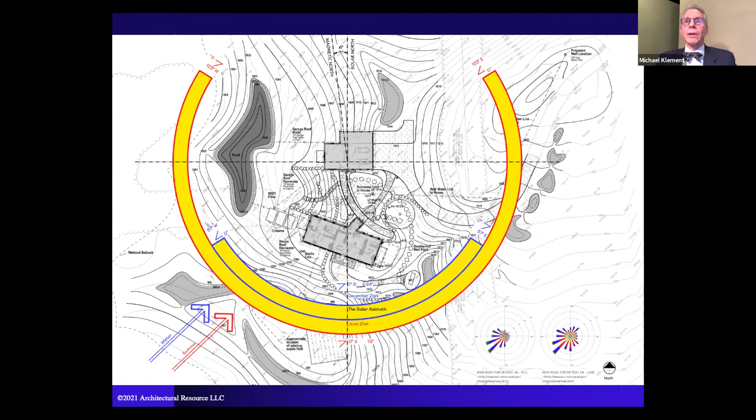But what are the particulars? Well, we're going to get into all the aspects of this project, what we did, how it performed, and the reasons we did that. This is the site plan showing the house above and showing the sun's path. The house was carefully designed and positioned to take advantage of that solar energy. But you might be thinking, certainly many people do, why in the world would Tom and Marty want to build a Living Building Challenge project? Well, let's hear from them directly.

It isn't as if we woke up one day and said, let's build a Living Building Challenge house. As we look back, it's a long series of small steps. And each step was simply the next logical thing to do. So we started with, let's build a house, let's build it out in nature somewhere. We found our 15 acres just outside of Ann Arbor. Well, wait a minute. Let's rewind. Because what you actually started out to do was a remodel of your existing house. Yes, it's true. That'll teach you to get an architect involved. Yes, absolutely.

So we found this land, and as we learned about the land, we realized that it had been farmed, industrial style farming, for many decades. And the soil was used up, worn out. It just happened at the same time we were learning about permaculture. Bigger title now is regenerative agriculture, ways of growing food that produce food for people to eat, but also regenerate the land. We also were learning about problems in food production and distribution in the United States. Factory farming, food deserts where it's really hard for people to find fresh produce to buy.

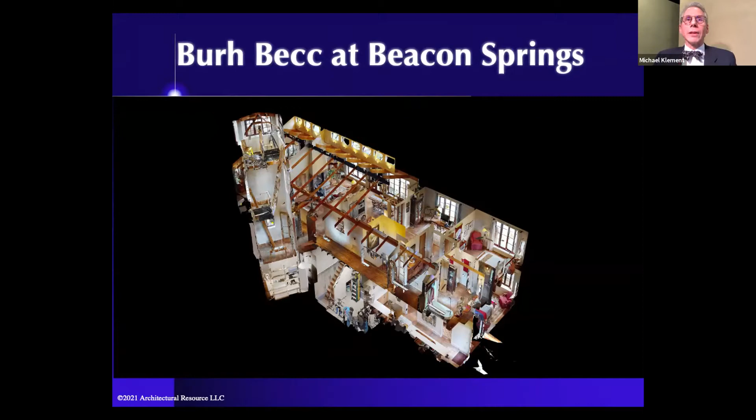And you can go and visit this yourself if you go to the Visible Green Home website, which looks like this. And at the top, there's the virtual Burh Becc Earth Day celebration. If you click on that, you'll get a drop-down menu. If you click on Tour Virtually, you will be able to access this exact virtual model that we're sharing with you today. So you can, from the comfort of your own living room, go and visit their home anytime you'd like to. And here again is that website, visiblegreenhome.com.

All right, so this is the entry area to Tom and Marty's home. And we're now walking through the small transition space, and we're coming into the large open living area. Again, I'm showing you this now, but you at your own convenience can go through and visit this house in the same exact fashion. And as we head towards the back of the house, we're looking out at the patio.

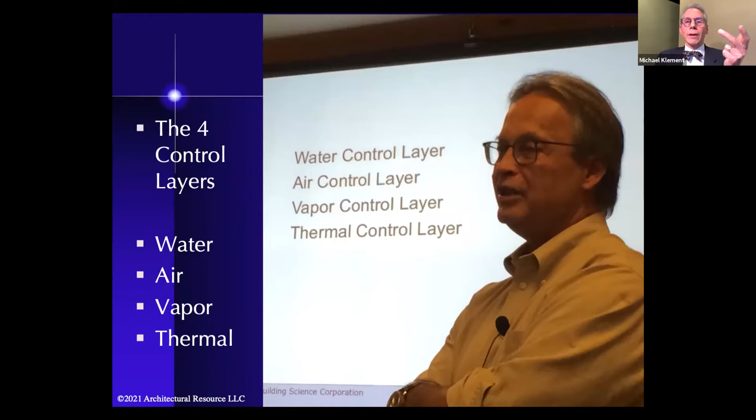And there are 4 components to that envelope that we have to be super diligent about: the water layer, the air layer, the vapor layer, and the thermal layer. And you'll notice that the thermal layer is the last piece. For Tom and Marty's home, we used a variation on something called the perfect wall. This was developed by Building Science Corporation and allows building walls to dry to the inside and the outside. Very important.

In Tom and Marty's case, we have an R30 slab. Now, for those of you who don't know, R is resistance to energy flow. It's the inverse of U, which is thermal conductivity. R30 is the slab; building code asks for R10. The basement walls are R30; building code asks for R5. The above grade walls in Tom and Marty's house are R48; building code asks for R20. And their roof is R68; building code asks for R38. So we are significantly improving the building envelope in Tom and Marty's house.

And this is a view cut through the exterior wall of the house, showing you the roof, the exterior wall, the foundation. And if you notice, this insulation plane, which is up here, continues here, all the way down here, and then under the floor and up the wall. This is one of the most robust and progressive building assemblies that we have ever designed.

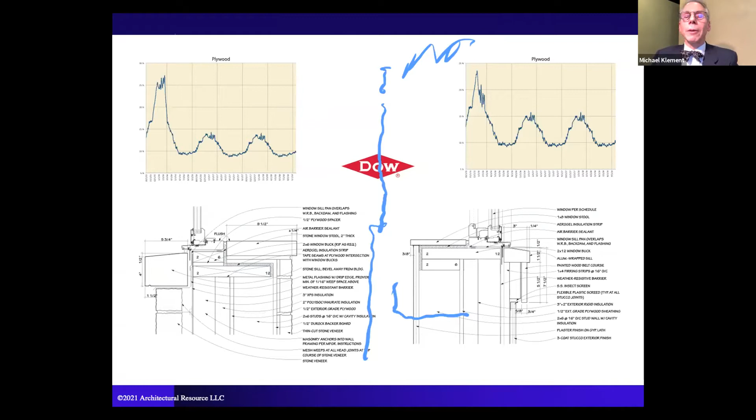Now, when you do this type of building assembly, you want to be mindful of, whoop, how come it's not clear? Delaney, can you clear my marks on the screen? For some reason, I don't seem to be able to clear that. See, if something doesn't go wrong, it's not a Zoom meeting. Let me try going back. There we go. All right.

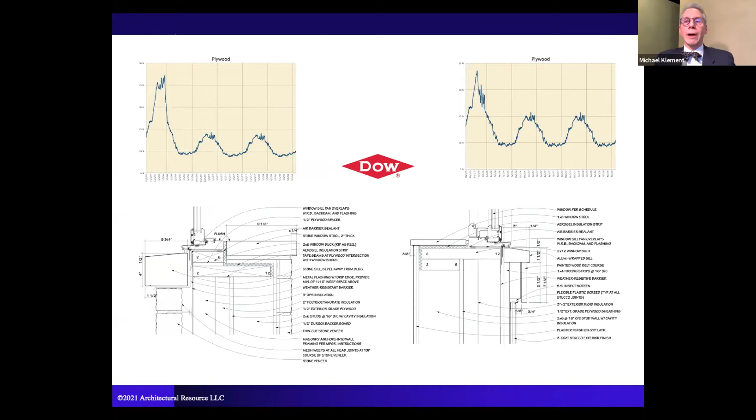So one of the things that we want to be mindful of when we design these high performance walls is the moisture content in that wall, because we've now reduced the drying potential. And so what we looked at is something called a hydrothermal analysis. Using that, we could see that the building wall was drying as time went on.

After we're done with conservation, we then look at utilization. These are the pieces of equipment that we use to heat, to cook, to cool our food. One of the things that we always invite people to think about when they're designing a high performance house is to cut the cord on natural gas.

I don't know if you've heard about this, but there's this little issue with carbon, which we're going to talk about a little bit more. But natural gas is being eliminated in many cities. I think, in fact, San Francisco just put a moratorium, or some city on the West Coast put a moratorium on new gas hookups. And the idea is we really want to shift over to an all-electric home.

One of the big pushbacks we usually get from our clients when we're talking about an all-electric home is cooking, because, you know, cooking with gas and the control you get with gas. In Tom and Marty's house and in other homes that we've done where we've moved to all electric, we have also had an opportunity to introduce to them the idea of using an induction type cooktop. An induction cooktop heats the pan, not the surface.

A gas range is roughly 40% efficient in converting BTU energy source into BTU in the food. With an induction range, we're 80% efficient. So it's a huge difference. And the other big thing that you'll learn about in a little bit is it helps to greatly reduce indoor air contaminants. We're discovering all kinds of interesting things with homes that have gas ranges.

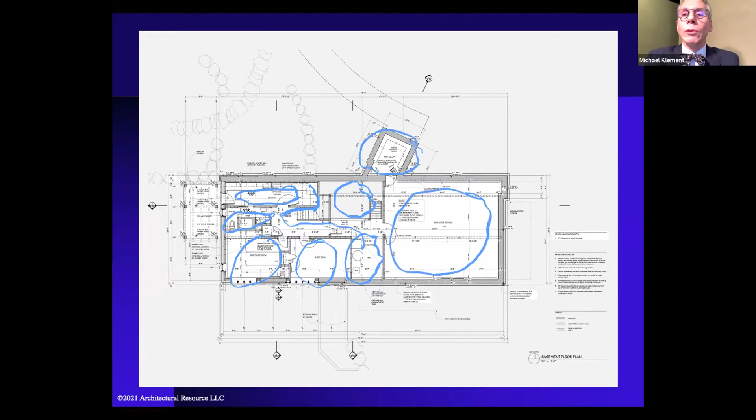laundry mudroom, a bathroom. There are 2 bedrooms, and there's a utility space, which is where we're going to go next. Adjacent to that is a plumbing pit, and then we have a portion of unfinished basement over here. And then this area, which is underneath that entry space, is a root cellar. So that's the layout of this lower level, and we're going to go down and walk around through using the Matterport tour. Hang on a second.

New share. It's kind of like driving a car with 3 steering wheels. All right. Are you guys seeing that yet? Not yet. Okay. New share. Desktop 3. Share. Okay. Let's see here. New share. Desktop 2, desktop 3. Share. All right. Are you guys seeing Tom and Marty's kitchen? Tom and Marty, are you seeing your kitchen? Okay. So Delaney, just so you know, I've lost Tom and Marty's audio. Oh, they're on mute. That's okay. All right. So quit screwing around, Michael. Let's get back with the tour.

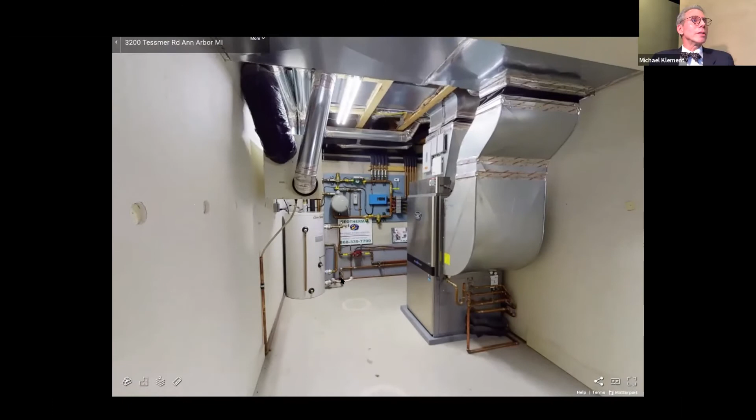Okay, so now we're walking through their house. This again is the long hallway. Heading down to the master wing, the primary wing. We're now looking down the stairway to the lower level. And we're going to head into the mechanical space. This is where we can see the equipment that Tom and Marty have in their home that is allowing them to be a net positive energy home. All right, moving on. All right, so we're down in the lower level.

This to the right is the geothermal heating and cooling system. What that basically is, is a heat pump that utilizes energy from the ground. How does that work? What we do is we run a loop that sends water out into the surrounding area. We bury this loop 6 to 8 feet below the ground, and then that brings air or water back into the house at a steady state temperature of 50 to 55 degrees. That's our starting point. That's our core energy, if you will.

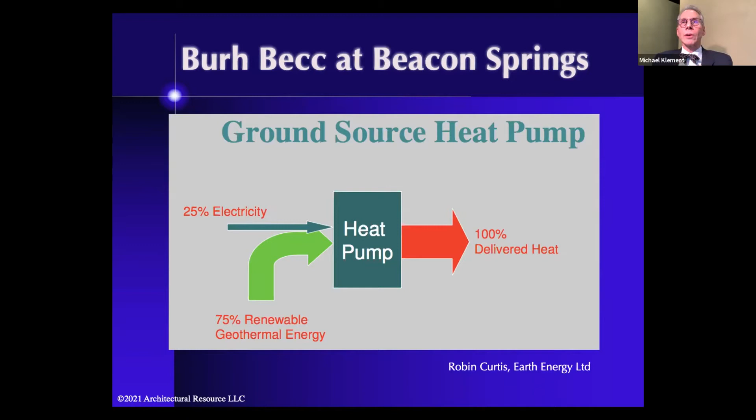And then we add 25% energy to run a compressor or an evaporator, depending on whether it's heating or cooling. And then we get 100% delivered heat. So this has what is called a coefficient of performance of 4. 1 unit of energy in, 4 units of energy out. That is part of the conversation when we think about utilization of energy, is how we're heating and cooling this home. We're going to move from here to the next conversation.

We've addressed conservation. We've addressed utilization. We're now going to talk about generation. And it's important to know that that is the last step we do. It doesn't make a whole lot of sense to add expensive solar panels onto your home if you haven't first addressed utilization, reducing the amount of energy that you're using, and conservation. First and foremost, reducing the amount of energy that you're losing.

So we're going to have an opportunity to actually show you how passive thermal works in Tom and Marty's home. Why passive thermal? Well, when we look at the renewable energy resources available here in Michigan, our first step is always to do an analysis of what's out there.

And in Michigan, at the location of Tom and Marty's home, what we found is sunlight was the best possible renewable energy resource. In some cases, wind energy is a good resource. As it turns out, the center part of Michigan has a wind resource level of 1. The coastal regions of Michigan have a wind resource level of 5, which is actually better than many areas of Florida. Who knew? But where this house was located, we looked to passive thermal as our strategy.

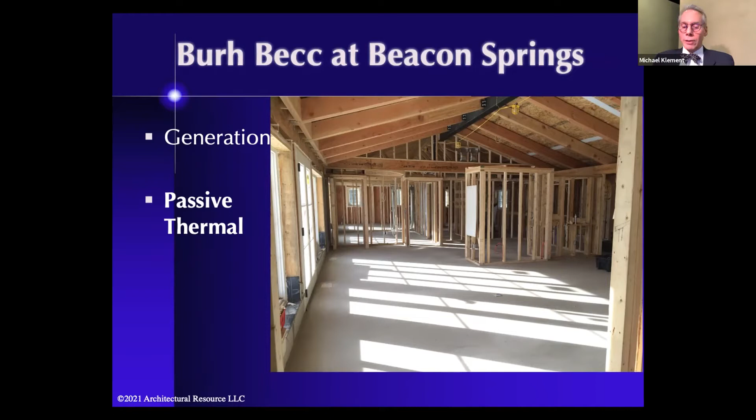And why would we do that? The sun doesn't send a bill. It's the ultimate source of energy. We cut out the middleman and go right to the source. And that's exactly what we did with Tom and Marty's home.

One of the things that we did as we were considering the location of Tom and Marty's home and the orientation and its very design is we took into account the different altitudes of the sun in the location of the home. And what we learned is that the summer sun is at an altitude that can be blocked out by overhangs. Let me go ahead and mark on this. So that summer sun coming down is shaded by the overhangs. That same sun in the winter can penetrate underneath the overhangs and drive deep into the building.

That actually works out fairly well because in the winter time when the sun is low, we want that energy coming into the house. However, when the sun is high in the summer, we can use a very familiar technique, which is called an overhang, to help block that sun.

The other nice thing about that is it helps to manage, remember the 4 control layers. Water was the first control layer for our walls. One of the ways that we help ensure longevity and high performance in our homes and low maintenance is having overhangs that direct the water well away from any kind of tracking down the face of the building.

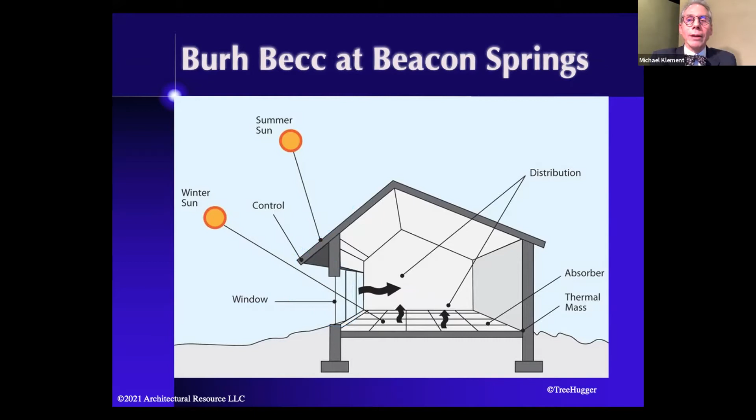So we're going to go next. So we were downstairs. We're going to come back up from the basement. We're going to walk through the hallway and we're going to land up here in the main living space again. So I'm going to jump over to the other screen.

Talk amongst yourselves.

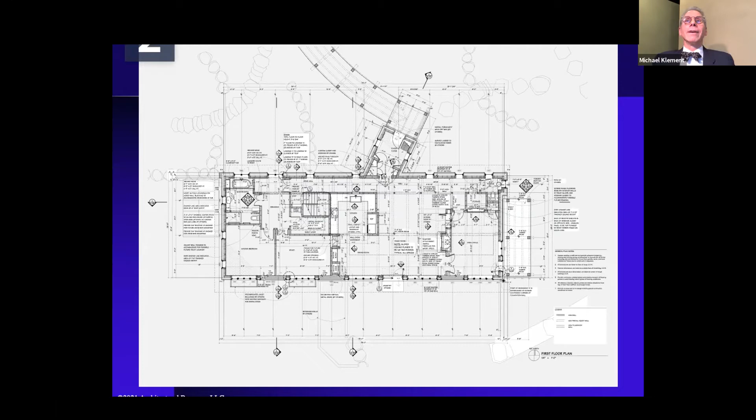All right. So we were downstairs. We're going to spin around, go back into the hallway in the finished basement portion. Head up the stairs to the circulation hall at the north of the home. Walk down the hallway to the center and then spin around and look at the main living space.

Now what you're seeing there is something called a clerestory. That's a band of high windows located above the primary roof form. This is a very effective way to bring sunlight and the sunlight energy deep into the house. And then if you notice there below those, we also have a full bank of windows. About 70% of the southern facing plane of Tom and Marty's home is windows. Now we're going to go back to the PowerPoint.

All right, so what's often fun is our clients on June 21, they'll send pictures from their mobile devices where the sunlight is magically stopping right at the base of the windows and not penetrating into the house on June 21, the longest day of the year. And then on the opposite side of the year, they're often amazed at how deep the sunlight penetrates into their house. I like to joke and say, it's as if it was planned.

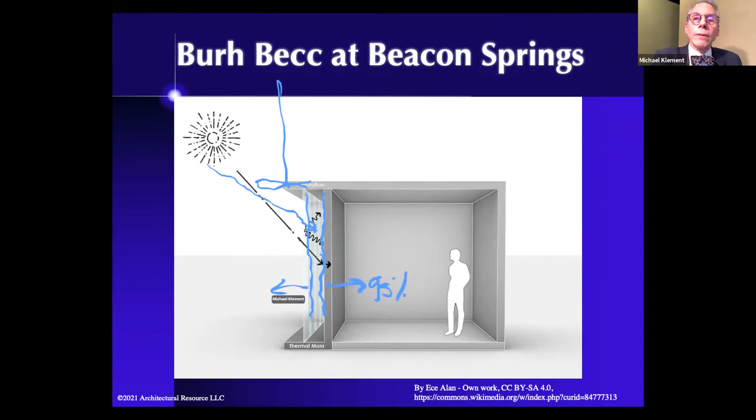And how this works is in the winter, when the sun isn't blocked out by the overhang, in the winter when the sun is low, the sun angles bring the sunlight in, it goes through a pane of glass, it lands on a selective surface, which is a surface that is coated aluminum, and it's designed to send 95% of the energy inward and only 5% outward. So basically, it's a one-way valve for energy.

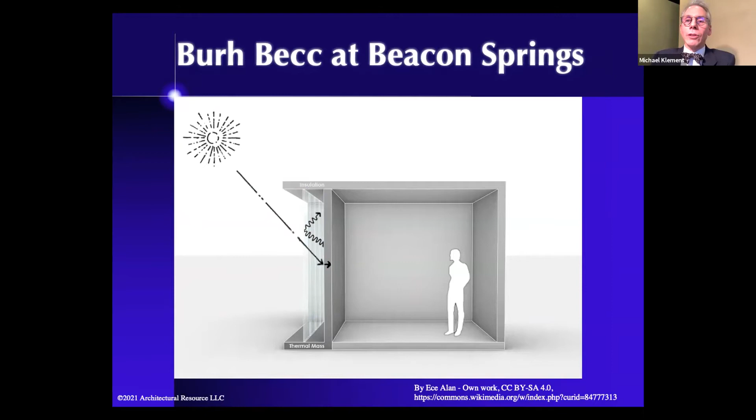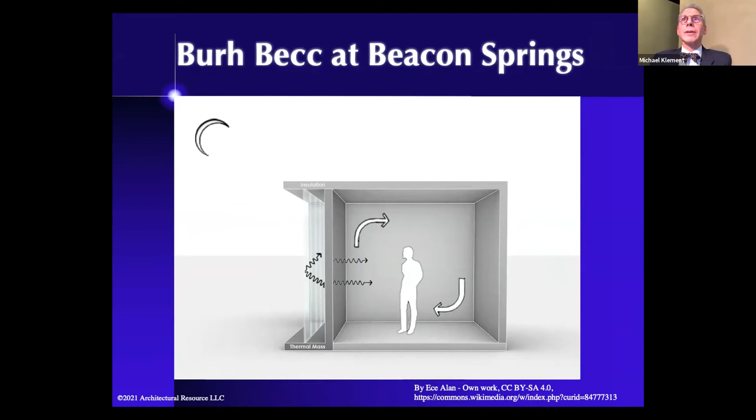That energy then accumulates in these walls, and then later after the sun goes down, that heat energy is radiating into the space. And what's nice about radiant energy is it's line of sight energy. So it doesn't decay as it moves across the length of the space. And so as that heat energy is moving into the space, then we get convective energy moving, and it's like a mechanical system with no moving parts. It's amazing.

Now you might say, that's awesome, but what does that look like? Well, we're standing right here. We're going to walk through the house, through the home study, into the primary suite, and stand here at the door to the primary suite. And we're going to show you what that view looks like here using the digital scan. So we're going to go to a new share. Excellent.

All right. So we're heading back this way. This is where Tom and Marty are sitting currently, at that dining room table. Hi, Tom and Marty. And then we're going to walk through the home study. And then we're going to come to the dressing area. And then take a hard left. Whoop. And one more. There we go.

All right. We're now standing in the primary suite bedroom, and I invite you to tell me where the Trombe wall is. Now, this is not a poll question. The Trombe wall is right here. So for all intents and purposes, to the user's experience, it just looks like a wall. But on the other side of that wall, there's some really exciting technology going on that's making a difference for Tom and Marty. So let's head back to the PowerPoint, and then we're going to take a look at what this looks like on the outside.

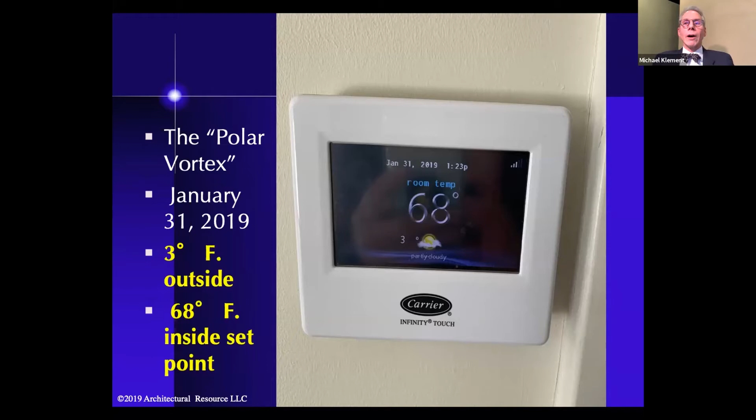Well, this is Tom and Marty's thermostat. And you'll notice that when they were looking at this, around 1:23 in the afternoon, it was 3 degrees. It warmed up to a balmy 3 degrees outside from the minus 16 it had been the night before. And their set point was 68 degrees on their thermostat. Well, how was it actually performing? The inside temperature was 76 degrees. The furnace was off, and they actually had to crack the window.

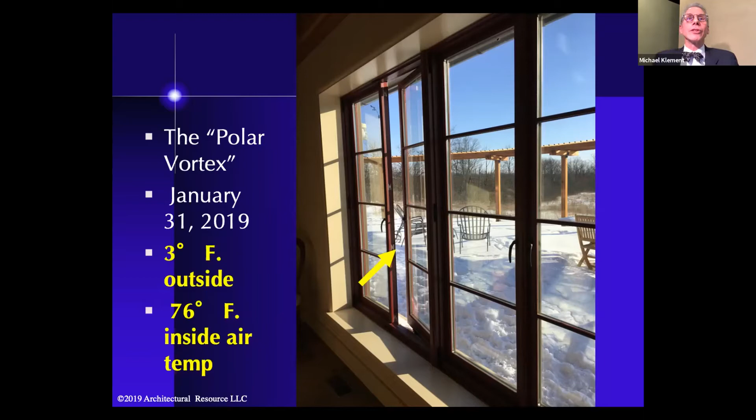It got a little too warm. And so they had this incredible experience while the rest of us were huddled down, bracing against the cold. Tom and Marty were breathing fresh, crisp winter air in a 76-degree environment, all with no moving parts, no added energy, no mechanical devices necessary, all using passive means. So that's what we like to suggest. Can this work? And Tom and Marty are going to say more about that in a little bit.

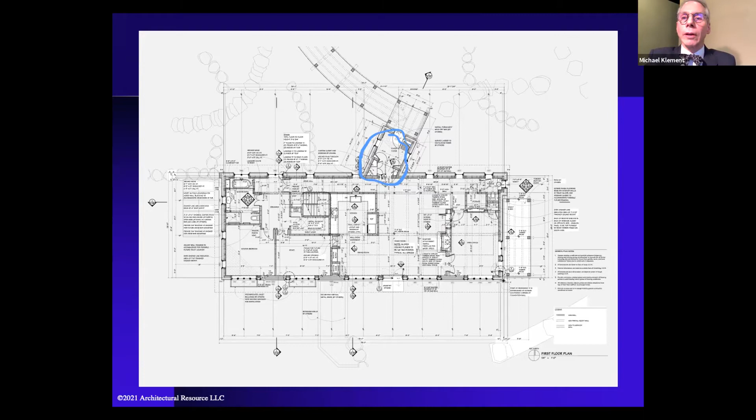So we're now going to move back into the entry area, because we've been talking about heating, which is great, but there's this other part of the year called summer. And how do we manage that? Is there some way that we can use passive means to manage cooling? Well, let's take a look. So we're going to move from there up into the tower. I don't know any of you who didn't notice that tower.

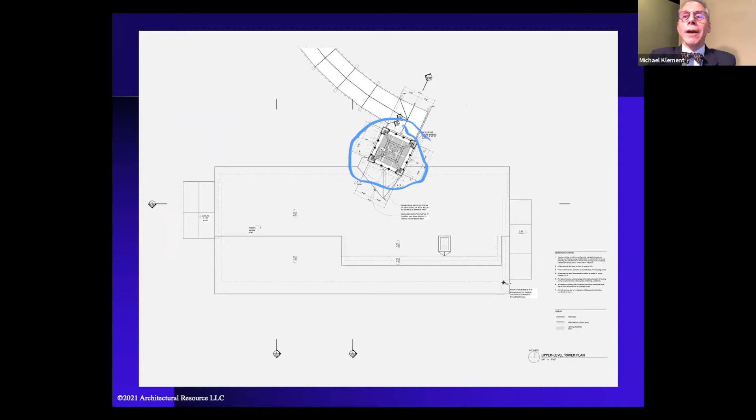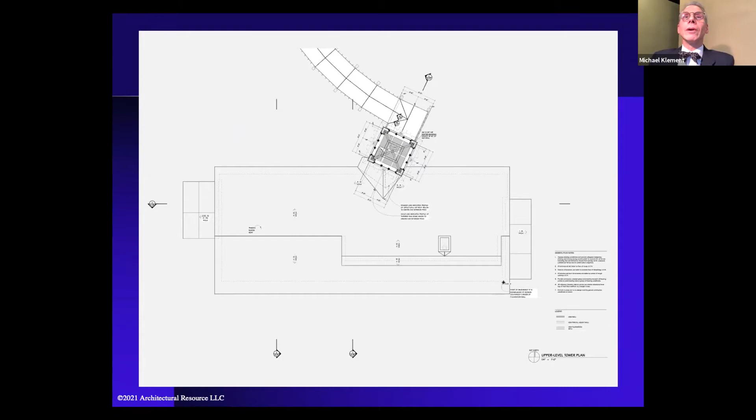The tower is one of the coolest architectural pieces on the project. And I mean, who doesn't want a tower in their home? But this tower is actually doing a few more things than you might imagine. This tower has actually been modeled using computational fluid dynamics in the University of Michigan Blue Lab from the College of Engineering. We did modeling to determine how we could actually use this tower as a passive cooling device.

So what do we mean? Well, we know that warm air rises as warm air is less dense than cold air. So with warm air rising, what if we were to build basically a thermal chimney that would act as a straw? And that could be at the leeward side of the building. So if the primary wind was coming to the house from the southwest, which we know it is because we did the wind rose studies, and if we wanted to put a ventilation straw, we would put it at the back

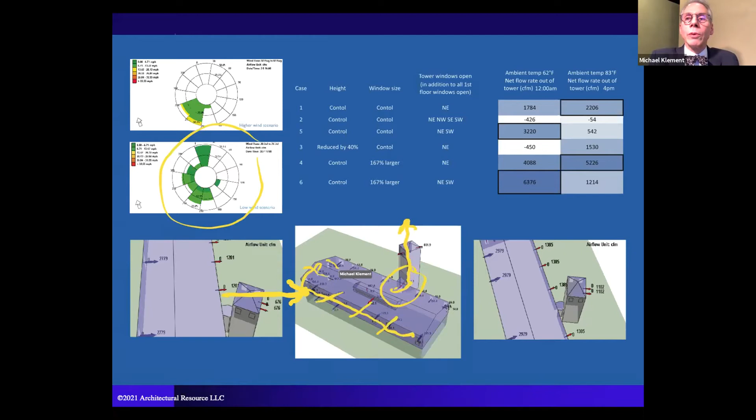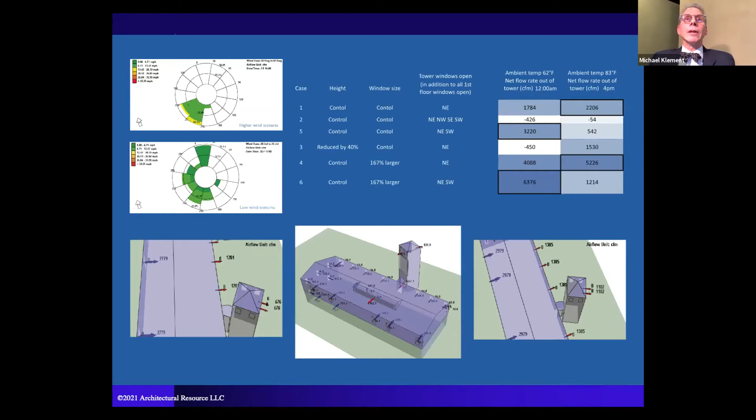And this is something that we could never do back when we were doing live tours: we're going to actually walk you through the rest of the house. Quick glance into Tom and Marty's bathroom.

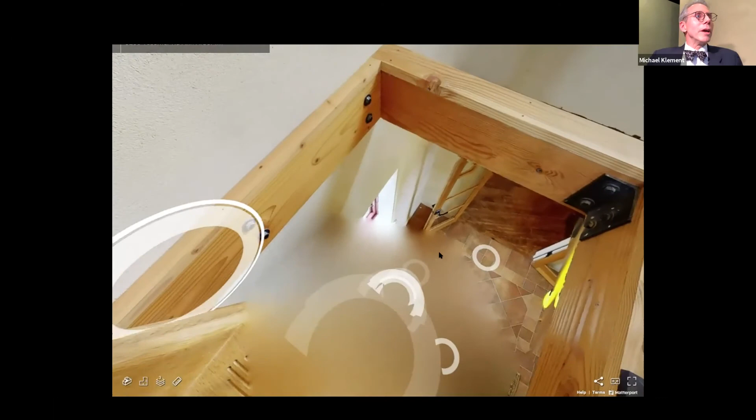Kind of feel like Superman being able to leap tall buildings in a single bound, something along those lines. I'm probably dating myself. All right, let's go back to the other screen.

All right, the last piece we want to talk about is generation. So we've done all these great things in terms of conservation. We've done these great things in terms of innovation. And now we're talking about generation. We've talked about the free energy, the passive energy. But at some point, we will have to add electrical energy to the home.

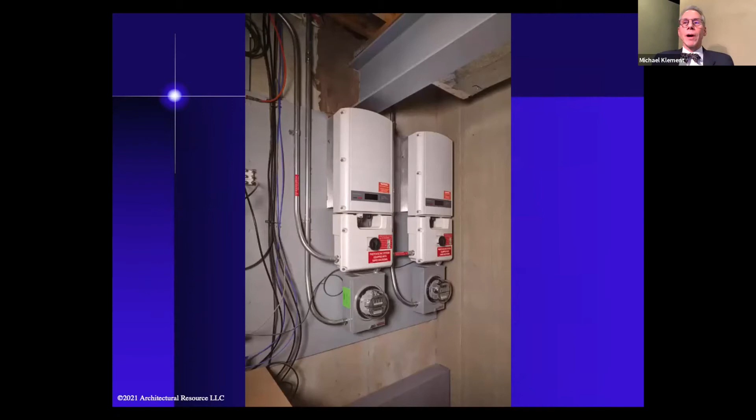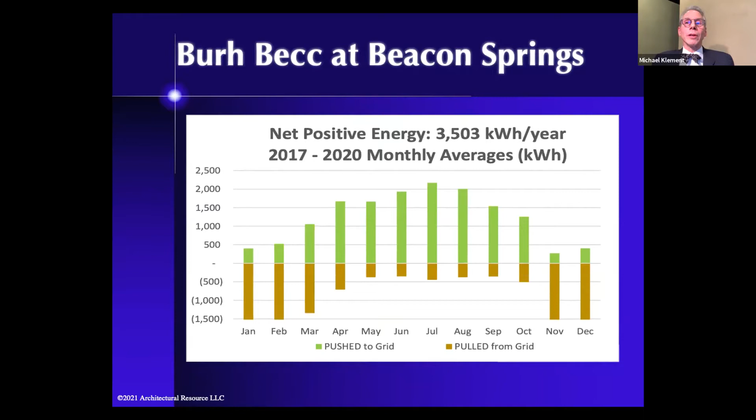And in Tom and Marty's home, we have a 16.8 kilowatt array on the roof of the farm operations building. And that is generating through those inverters all the power it takes to run this house and charge an electric vehicle. And Tom has been awesome, and he's been keeping track of the power over the years. And we're really excited to report that at this point, with 5 years in, we are looking at, including charging an electric vehicle, an excess positive energy of 3,500 kilowatt hours per year. That's enough to charge yet another electric vehicle.

So with Tom and Marty here, we'd love to get their input. And Tom and Marty, if you could share with us a little bit about what is it like to live in an energy-free home?

Wait, I think you have to unmute yourself.

The main thing that feels so different concerns the passive aspects of the architecture and structure of the building, the things that Michael just went through. We don't really notice in terms of experience anything from the photovoltaic system overall. All that's doing is substituting for supplementing from the utility company.

And so the thing that really is amazing is how warm and comfortable the house stays all winter long, where we bring it up to 69 to 70 degrees once you get through a shoulder month or two, and it just stays there the whole winter. And most of the time the only air blowing around has to do with the heat recovery ventilator. It's to keep fresh air in the house, but there are no fans running. There's just silence and warmth, including, as Michael showed you, all the sun shining through the windows.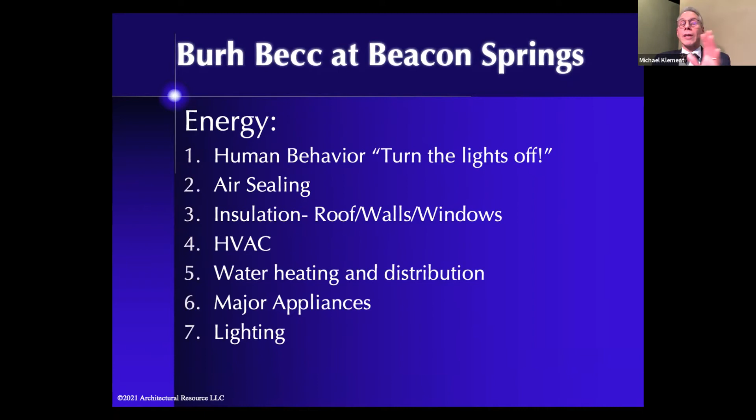Insulation, so air sealing comes before insulation. Focus then on your HVAC. Focus then on water heating and distribution. Focus then on major appliances. Focus then on lighting. Those are the steps that we recommend, in that order, whether you're looking at designing a new home or remodeling an existing home. These are the steps that we always recommend looking at. All right, now we're going to have a poll question.

What is the most abundant and yet most scarce natural resource on the planet? And your choices are carbon, platinum, unobtainium, or water. I know, Tom and Marty, you're going to vote for unobtainium. I know you are. We're going to give you a few more seconds here.

All right. How did we do, Delaney? Immediately, people started voting for water, and that is the winner. 85% of them chose that answer. Great. All right. Well, let's jump into the next section and see how you guys did. It's a good question.

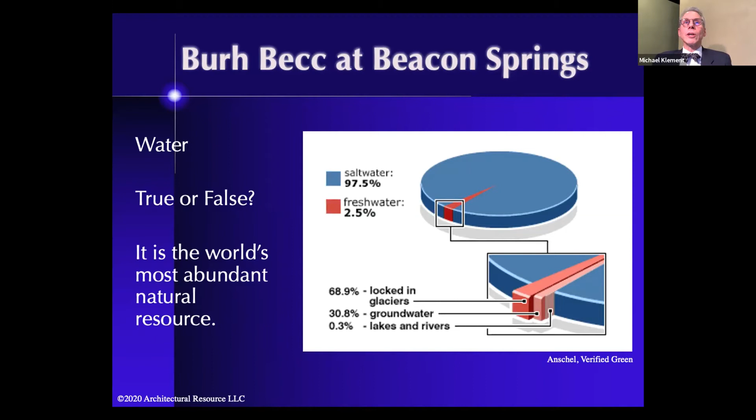True or false? Water, the world's most abundant natural resource. Of all that water you just saw on the screen, 97.5% of it is salt water. 2.5% is fresh water. Of that 2.5%, 69% is currently locked in glaciers, and we're doing our level best to turn it into salt water. The rest is groundwater, and only 0.3% is lakes and rivers, which is where we get much of our potable water resources from. So what does that actually look like?

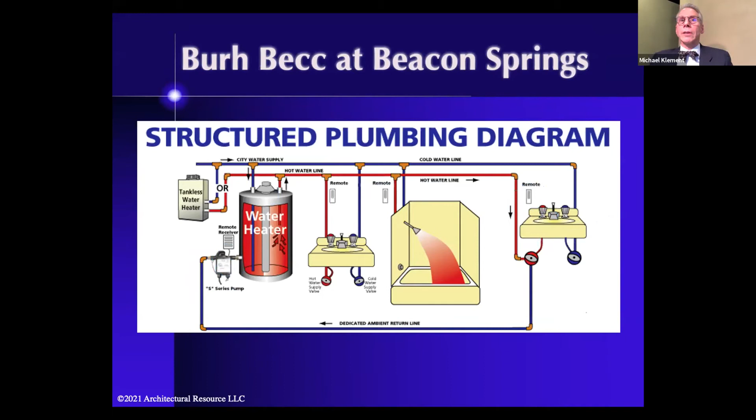So that water that would have typically been going down the drain is now sent back to the tank. So this way we can bypass one of the larger areas of water loss, which is waiting for water to get hot in a home. And in Tom and Marty's home, we have these opportunities for all these different water devices, and everything has an activation pump to be able to bring the water back. So that's a very simple system that's easy to do in a new home. It's possible to do in an existing home, but it's called a water recirculation loop.

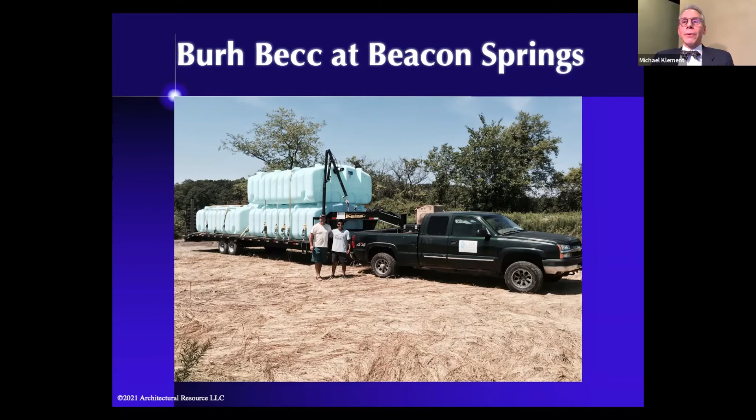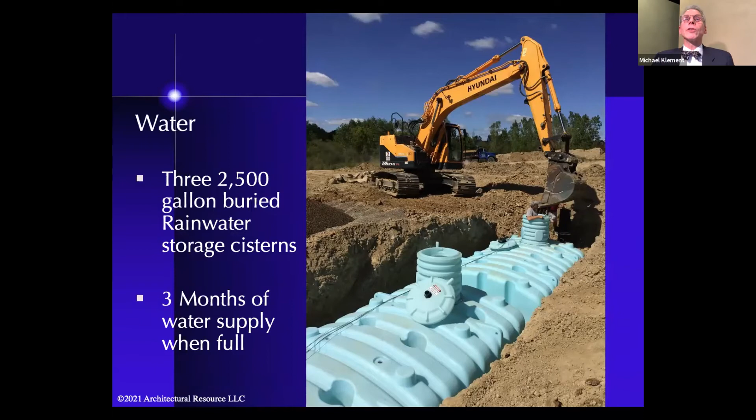Now, at Tom and Marty's home, we did all of the conservation measures, and then we went into the kind of generation measures. We're actually drinking water from the sky. This is the delivery on the day of delivery out at Burh Becc at Beacon Springs, when they showed up with the tanks. And then this is the tanks being buried. We have three 2,500-gallon cisterns that will give us a total of roughly 3 months of water supply using continuous use when they're full. And we go through special devices to extract all the debris, and then we bring it down into a filtration area.

So we're going to go down to this plumbing area. We're going to walk through the house. I'm going to actually take you down into what we call the plumbing pit. Again, something that we could never do when we were live in person. And let me go back to the digital scan and share screen. All right. So coming back into the main north hallway. And heading down the hall, going back downstairs. And then this is the mechanical area that we were in before. If you remember, the mechanical area is to the right. We're now going to actually take you down to the plumbing pit. And again,

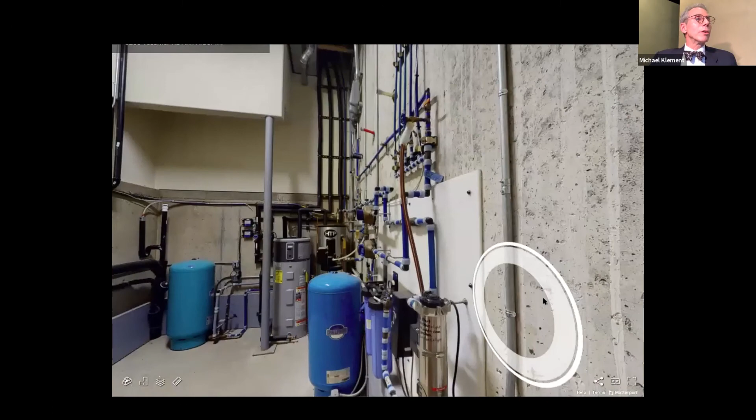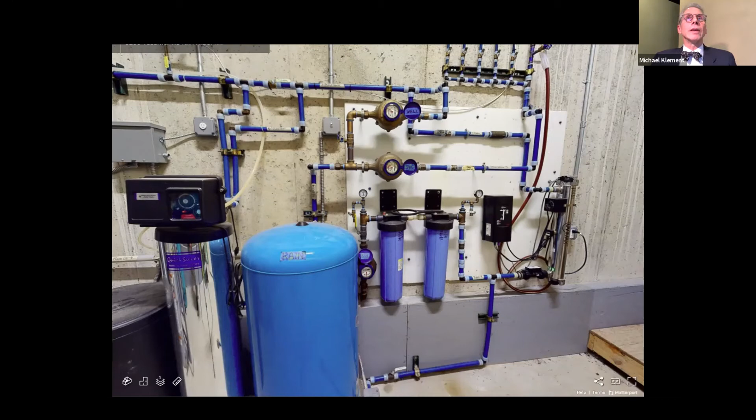So here is our water management system. This is where we have our 3-part water filtration. We go through a sediment particle filter, we go through a carbon filter, and then we go through a UV sterilizer. This system is creating water from the sky that has actually been tested to be more pure and a higher grade than the water that we're taking out of the ground for the well. And Tom and Marty will talk about that in a little bit here. But this is the exciting thing about this, is we know it's possible because we're doing it.

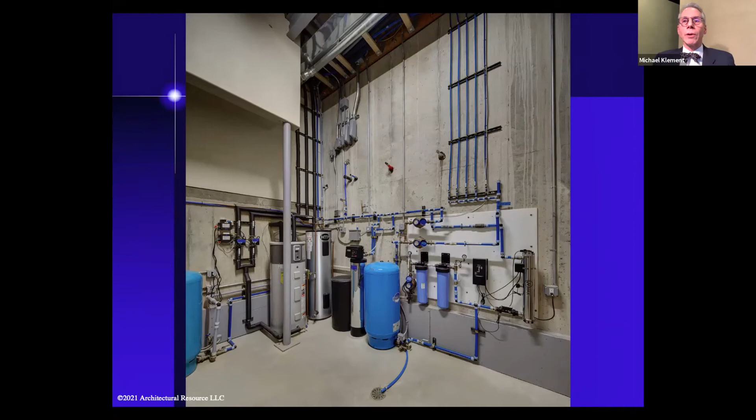The down part to this is when we took this to the building officials and said, we'd like to be harvesting this water and we'd like to use it for potable purposes, they went to the strict building code and they said, you know what? It's not in the code, we can't approve it. And I get it. They're interested in maintaining health and well-being for everyone in the country, including Tom and Marty. And so at Tom and Marty's home, unfortunately, the situation is we're only legally able to

drink water from the ground, and the outside hose bibs are plumbed for the rainwater, which means that Tom and Marty's foundation plants are drinking better water than Tom and Marty are drinking. But I'd love to hear from Tom and Marty. Any thoughts on what it is like to live in a home that literally drinks from the sky?

Well, yes, water is precious, and many of our current methods for sourcing and managing water have to do with getting rid of water: get it away from the buildings, get it away from the roads, get rid of water. When in fact, what we need to be doing is use water as it falls on the land, use the water as it's going on its normal path. So everything that we've done here, the house and also the regenerative agriculture, has to do with collecting the water that comes to us and using it.

And then when we're done using it, we don't push it away and send it down the hill where it's going to erode the soil and be gone forever. We keep it for the agriculture, we keep it in swales, which are dips on the contour of a hill, collecting the water and allowing it to soak back into the ground.

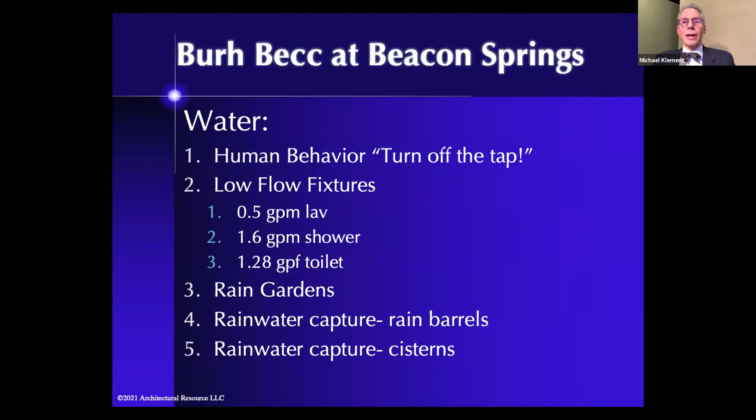Then, as Tom and Marty were talking about, rain gardens, helping the earth so that this water doesn't run off and become stormwater. Rainwater capture, rain barrels, something quite simple. And then the ultimate holy grail is rainwater cisterns. And it's so funny because in the early part of my career, when we did a lot of work on older homes built in the 20s, there was always this lurking potential that a cistern would be discovered. Well, now we're putting cisterns in. So there you have it.

All right. Poll question as we move into our final section of our morning conversation. How does the air quality in your home compare to outdoor air? And the answers possible are: it's either much better, slightly better, same, or slightly worse. And we'll give you a few seconds to weigh in on this.

How are we looking, Delaney? 75% of you have said slightly worse. All right, so let's have a look and see. We got someone that's 1% says much better, slightly better, same. All right, let's have a look.

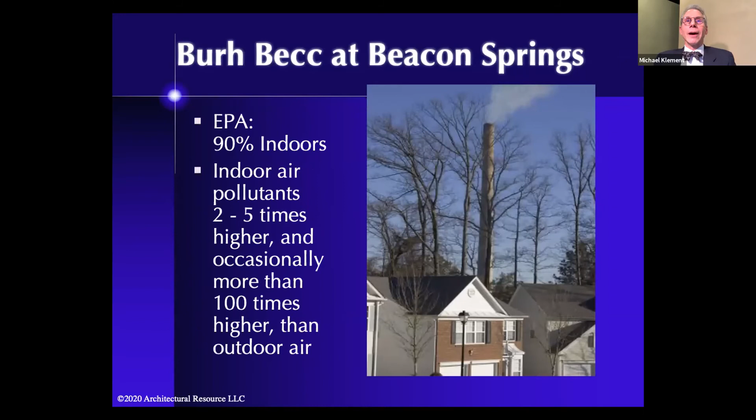So it's interesting because many of us live in city environments and we're considering, what's the air like inside of our homes? Well, as it turns out, we live 90% of our life indoors, either in buildings at work or buildings at home. And the indoor air pollutants are 2 to 5 times and occasionally more than 100 times higher than outdoor air. Well, that doesn't sound so good. And the Journal of Allergy reports that 1/3 of our buildings are toxic or deficient in ventilation. Well, ventilation is the key.

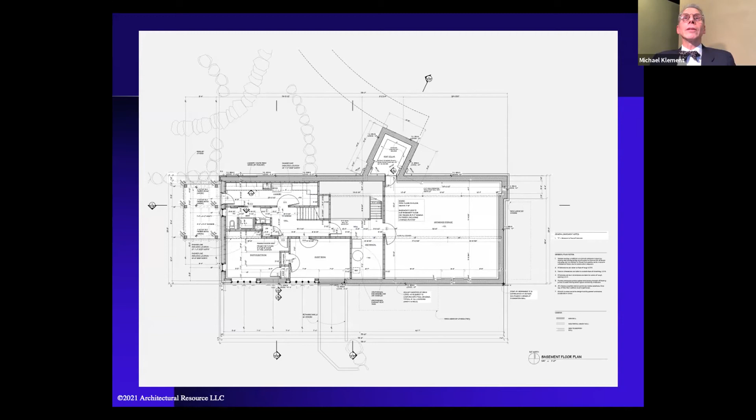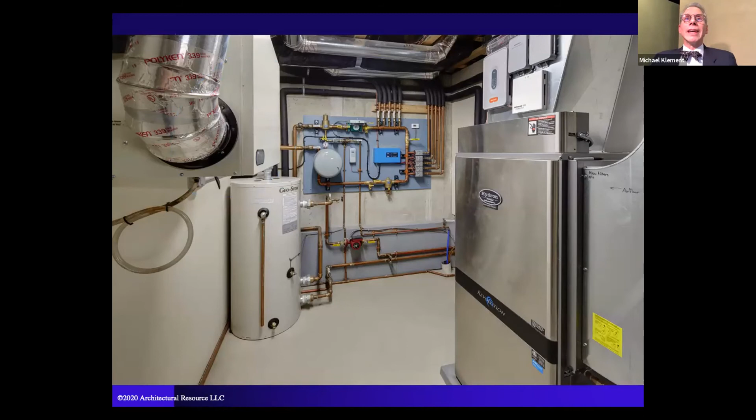And one of the things that we're going to be taking a look at is something called the heat recovery ventilator. So we're going to go back downstairs and land over here in the mechanical space. And we're going to show you Tom and Marty's, basically what we like to say, the lungs for the home. So looking over here to the left is the heat recovery ventilator. And how that works is it basically is exactly like I just described, the lungs for the home. It takes the stale indoor air and exhausts it to the outside. And it takes fresh outside air and brings it to the inside.

These two air streams will pass one another, but not touch one another in something called an enthalpy core. And they're going to exchange energy and heat so that you're basically ventilating. It's like having a window open, but without having the heat penalty that usually accompanies it. And what we thought might be fun is for Tom and Marty to take a look at what their air quality was.

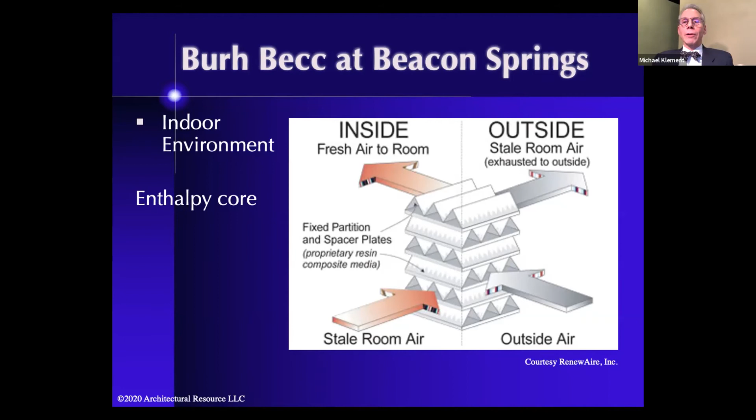And so about a week and a half ago, we gave them a device that is an air monitor, something called Airthings Wave Plus. It's one of the many devices that's out there. And we like it because it shows a lot of the really important aspects. It measures radon, volatile organic compounds, and CO2. And the thing that we're particularly interested in these days is CO2. Carbon dioxide is used as a marker for indoor air quality in terms of biologics.

And so with everything going on these days in terms of indoor air quality and viruses, what we like to see is a very low number of CO2 parts per million. What we're finding is average outside air lands around 400. Really good indoor air lands around 700. The highest threshold that you want it to be would be 1,500. Tom and Marty's house, after having it set in their home for a matter of days, has come in at 58.9. I don't know that I've ever seen a house at

589, pardon me, 589. Thanks, Tom. You were leaning forward. I think you were giving me a clue. Yes, 589, which is outstanding. And then the radon, below the 4.0 action level, the VOCs, that's off the chart on the bottom at 82, just absolutely amazing.

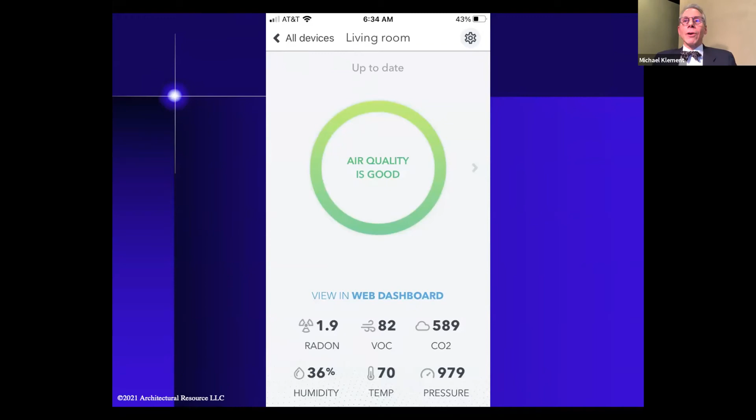So let's have a little conversation with Tom and Marty about what is it like to live in a home with indoor environmental quality, such as a Living Building Challenge certified home provides? Well, the thing I'd like to mention on that is one of the imperatives of the Living Building Challenge within the materials petal. So of the 7 petals that Michael talked about, one of those is called materials. And within materials, there is an

imperative that all the materials that are used to build the house are run through the gauntlet of a red list to ensure that none of 500 different toxic chemicals are used in any of the products that go into the house. And while it was an arduous process, because we vetted around 950 products during the project, roughly 550 of those were acceptable, and we rejected the other 400. And this one really addresses the VOC, the volatile organic compounds measure there.

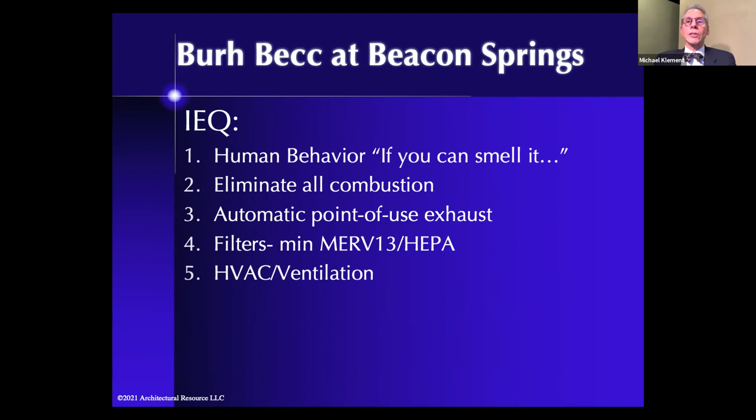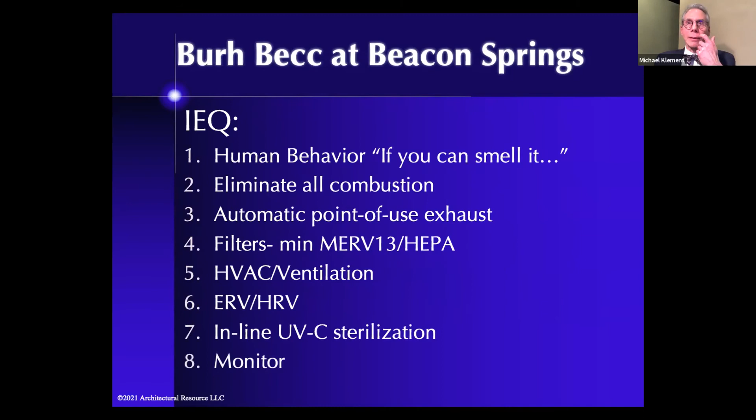And do you have an ERV or an HRV? And last but not least, inline UV sterilization, which is the extreme. And that is what we're seeing going on these days with the virus concerns. And then as Tom and Marty have said, monitoring, really seeing what's going on. So Tom and Marty,

here we are at the culmination of an incredible process with you guys living in a Living Building Challenge home. I thought we'd give you a moment just to share, what has this meant to you? What has this been like? What is it like to actually live in a home at this level of performance? When we started talking, Marty talked about the little steps that we take all along the way through this project. Well, we've been at this almost 10 years now, and we have noticed a real shift in our thinking about what's important for us personally. We've been married 40 years. We've been partners a long, long time.

And in the beginning, I'd say the thing that seems to really be leaving us was present in the beginning. And it was an orientation to doing a lot of stuff for ourselves. The way we were spending our lives, especially early in this project, had to do with the beauty of the place, and we were going to meet the challenge, make the grade and get full living status for this huge project that we're doing. How could we have a demonstration farm and sustainable farming methods? All these things, meeting the challenge of moving this industry forward and so on.

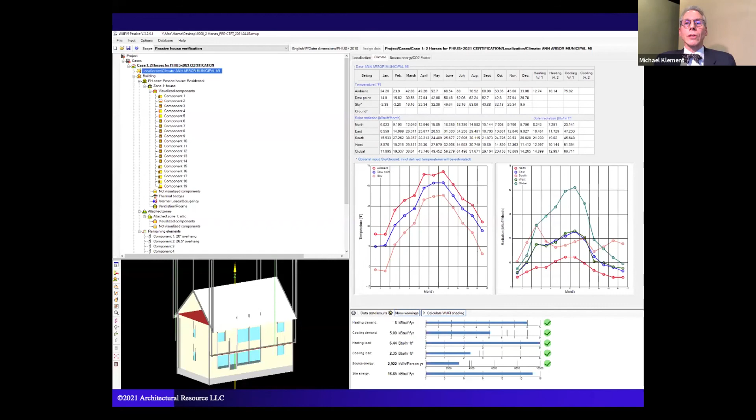We ended up generating a team that had 2 builders, 2 lenders, a green consultant, a quality control, quality assurance rater from the PHIUS organization, and 4 sets of clients. And we worked together across the course of these 2 years to generate a passive house that would be available to anyone at market rate. And I'm really excited to say that we have done that.

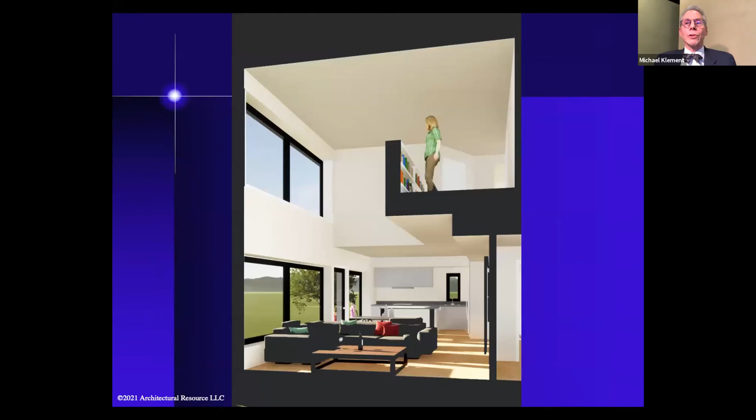And many people, unfortunately, don't know about these kind of homes. They know about something that we call BNO. And I'd like to invite Gary Cade to join us now and share briefly a little bit about BNO.

So Gary, you have to turn on your video, I think. Yeah, Michael, I'm actually trying to do that. You're doing great. Oh, there it is. Okay. It's Zoom. Great. So, Michael, thank you. Really exciting. Hi, everyone.

Gary Cade. Michael, I've been working with you very closely for 5 years, and I've just been amazed by you and your team. First, Tom and Marty's Living Building Challenge. There's only 2 on the planet. And now a real game changer, the 2-horse project. The last barrier for the high performance passive house is the cost. But now the game changer is that we can do the design and build where it actually is cost parity with conventional building. So the last barrier is smashed. Again, cost parity with conventional building.